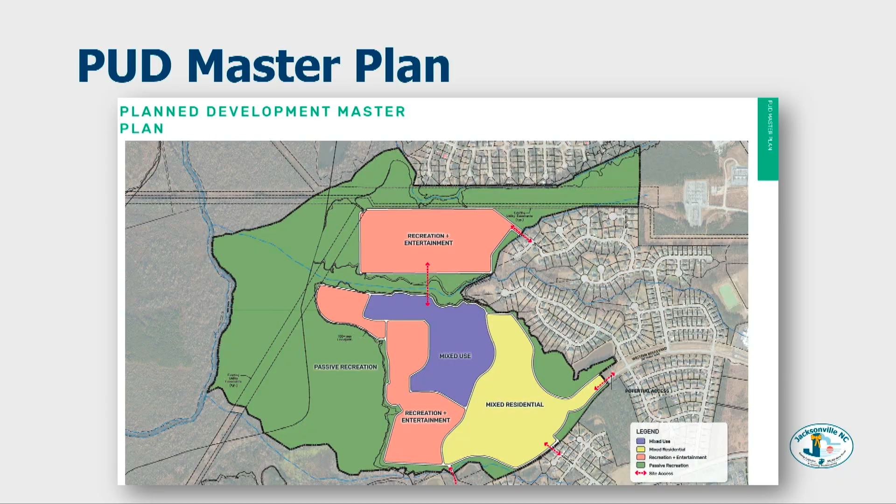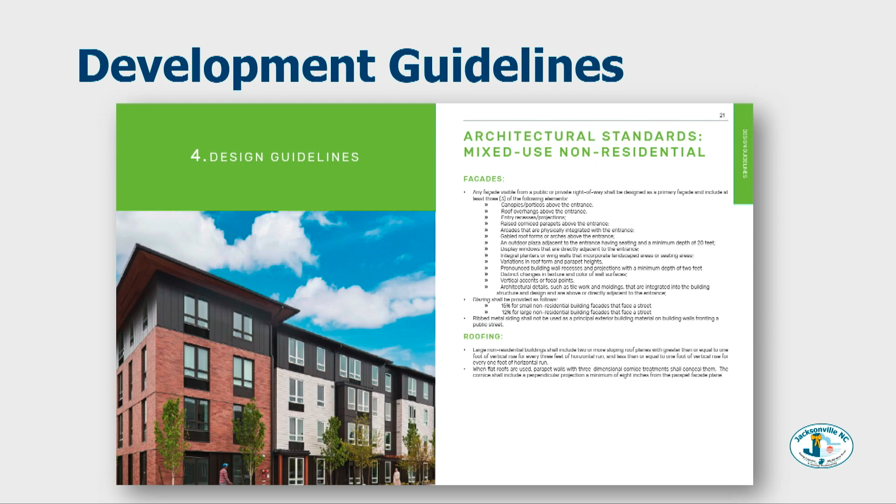The PUD is also going to include design guidelines. This is another way for us to make sure we're going to get the product we're looking for. You can see guidelines here for mixed use, non-residential, but it also has guidelines for residential and commercial and all the other different components we expect to be built out there.

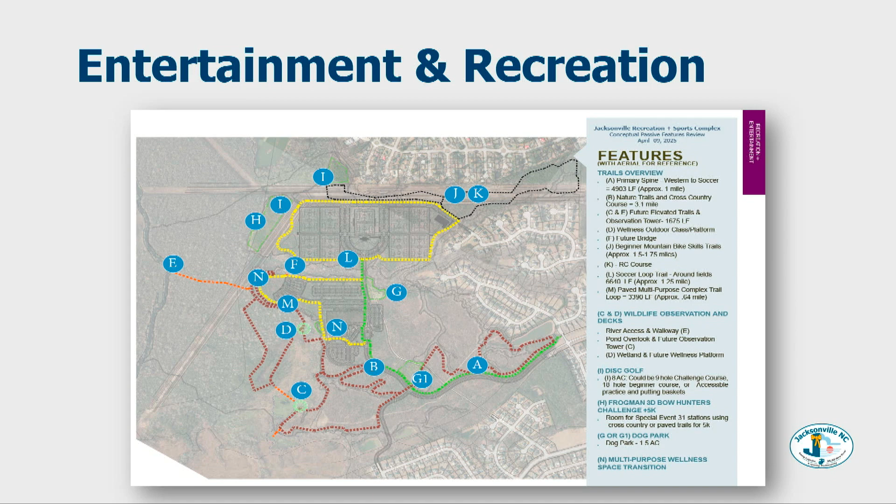Again, this is an excellent plan. It's something we want to carry forward with the planned unit development, but please know this plan has been very closely coordinated with the Parks and Recreation Master Plan that council adopted last year.

There's a dog park on there. Yeah, I'm seeing it. I have a lot of happy people—we get a lot of feedback about dog parks, so do we. And Michael pushed for a golf course, so you see a disc golf course because he didn't clarify what he wanted, and so that's on there. We've checked the box. He actually asked the county for a golf course, but they just told him no.

You see the uniqueness in that plan, trying to satisfy a lot of the needs we saw in the survey in one master development, which makes the PUD challenging but also very special for an end product. I hope by the time we get to the end you realize there are hundreds of hours of work by lots of people to make this the best possible product we can.

Transportation, last but not least, we're not going to get into the details here tonight. You'll hear more about it in the planned unit development hearing we'll have. But the good news is that it doesn't appear we're going to have to make any adjustments to the DOT infrastructure out at Gum Branch and Western.

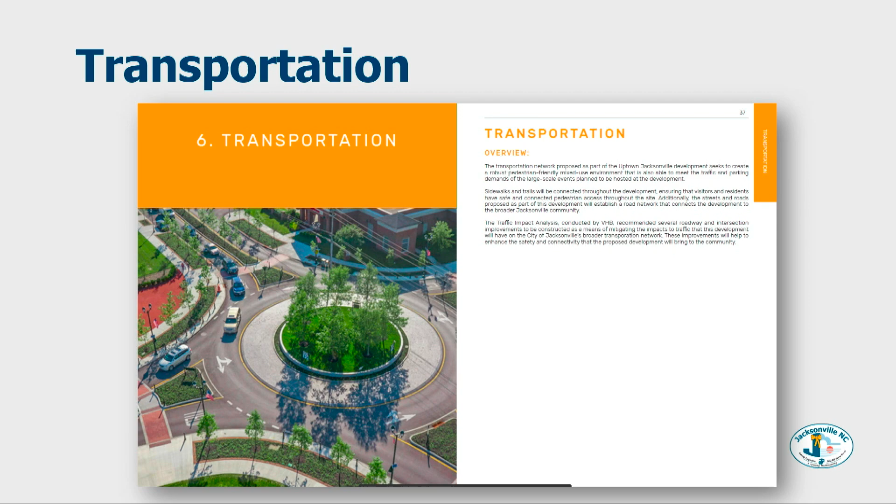As you recall, that roadway was just recently widened. And the widening out there came at a great time for us because we're going to be able to take advantage of it with this project, not having to make those improvements ourselves.

So it is moving forward. We are a little bit behind the curve on the timeline, mainly because we needed some survey data that we didn't have to get it started, but it's still well within the tolerances of the overall project.

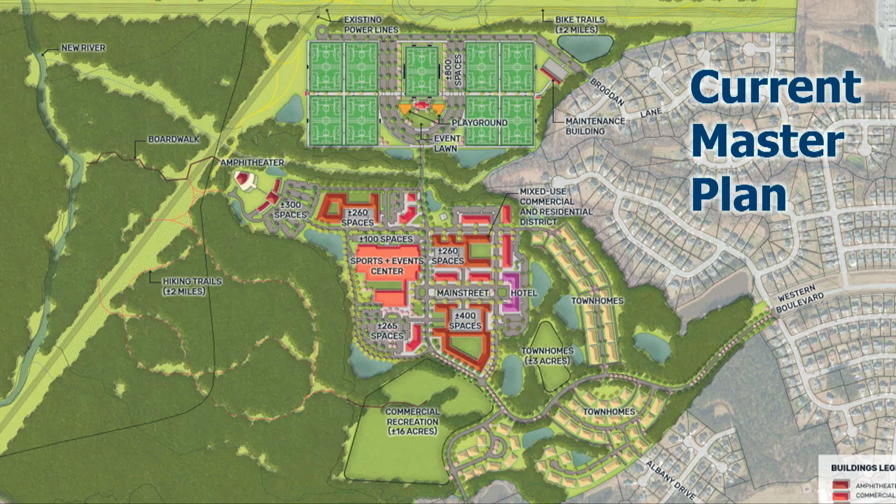So we showed this to you last time as well. This is the current master plan. It hasn't changed substantially. I'll show you a couple of areas where it's a little bit different in the future, but overall this still remains very valid.

And we're calibrating on the athletic fields. We have a consultant called Fit Fields, and that's all they do for a living, is design athletic fields. They're helping us make sure we get the maximum utility out of these, but also minimize our maintenance and resolve a lot of the operational concerns that come up when you have multiple different events going on at the same time in the same place.

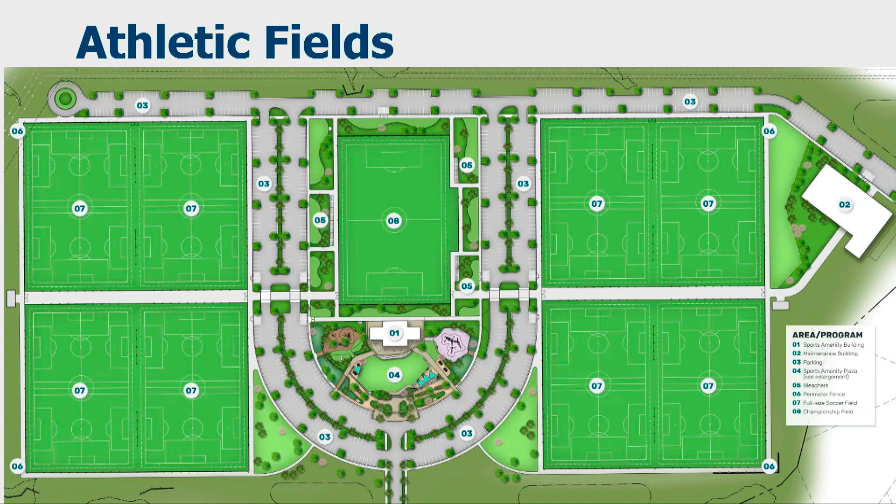So we'll price out turf too. We'll have several options for you to consider. There will be turf in that plan, because really that's the best way to make sure we're able to use it as much as possible. The grass is just unreliable, mainly because of weather. It's also difficult to maintain. So it's kind of a balancing act, cost versus.

Pay for it up front, then? Yeah, exactly. We'll have to figure all that out, but what we want to make sure is that we've got a sound concept here, and then we can help develop multiple pricing options and go from there. I can tell you turf fields are hotter too, the temperature around them is quite a bit warmer than around a grass field. You act like you have experience.

The other challenge with turf fields is that you have to treat stormwater. It's impervious. On a typical grass field, you don't have to treat the impervious surface. So these are all things that play out in not only the capital cost up front, but also the long-term maintenance.

We go with a mixture, part turf, part grass. And that's the beauty of these consultants. When Dave comes in and starts talking about managing these facilities, he says, in these other places where we have facilities, how do we maximize their utility? How do we get that space? A lot of the time we focused on the multi-use complex as being the indoor facility, but this right here, just seeing this picture tells you not only soccer and flag football and field hockey and lacrosse, but there's so much more activity that can happen here in this center that creates utility we just haven't seen before.

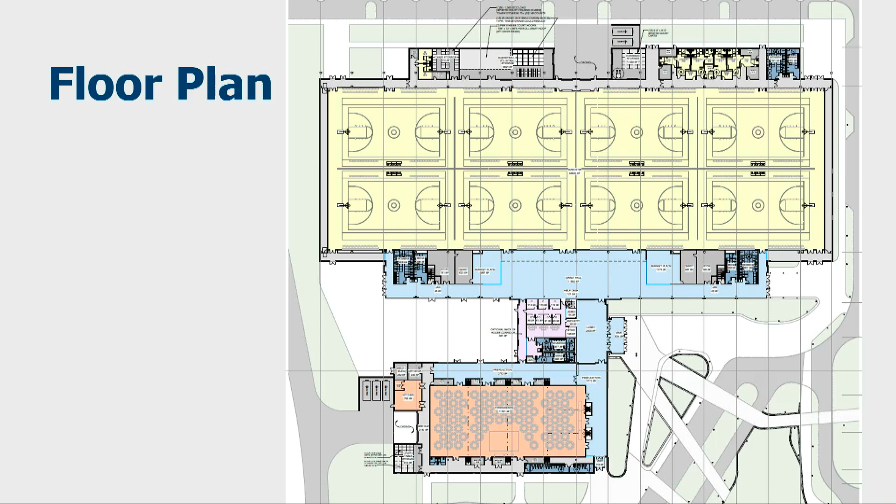So the northern side of the building is what I'll call the sports area - that's where the courts are, the large open space, all of that. Down here is where the conference area is. We have a courtyard in between the two that's going to be a controlled access area where patrons of the site will be able to go hang out or eat their lunch, dinner, whatever they're there for - an outdoor space in that controlled environment. And then we'll have a main entrance as well as the conference entrance.

Now, those aren't mutually exclusive. They'll be able to be used for both purposes, but we're just labeling them two different things to give you context there.

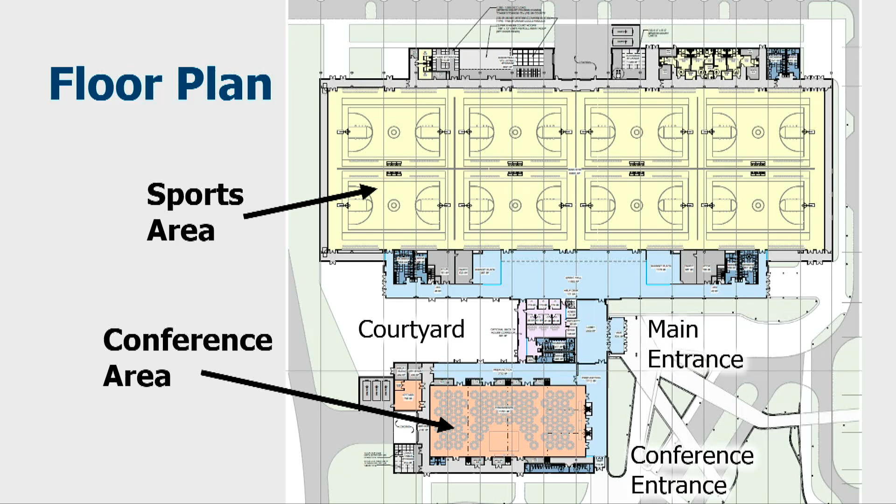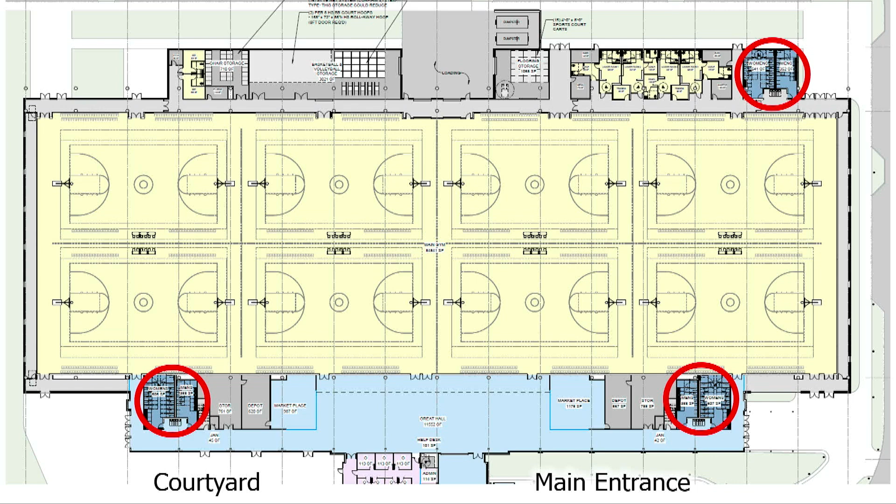So looking at the sports area, we heard loud and clear - I think Mr. Warden, you brought this up last time, and we also heard it from lots of others on the project team - restrooms are mission critical. So we went through and calibrated not only on the number of restrooms, but also on the location. We haven't expanded the footprint or square footage of the building, but what we have done is repurpose some of that space to include additional capacity for restrooms.

We also revised the loading dock area, so you can see that the loading dock is coming in from the side as opposed to the rear. That's feedback we've gotten from a whole variety of stakeholders on the project, and it just makes sense.

We also worked on the storage. Storage is a huge need for the facility, and what we've learned in a lot of the other facilities we've been to is that there's no such thing as too much storage, but there's only so much money in the budget to pay for it. So we want to right-size it. We spent a lot of time looking at what we're going to need to store, where, when, and how to get it out on the floor. So we've really honed in on what that plan is.

And last but not least, we've also been working on the locker rooms and the other rooms that support the athletic events. Dave from VenueWorks has really helped us figure out a lot of the details there. But again, this concept overall is the same - we've just really calibrated on some of the details.

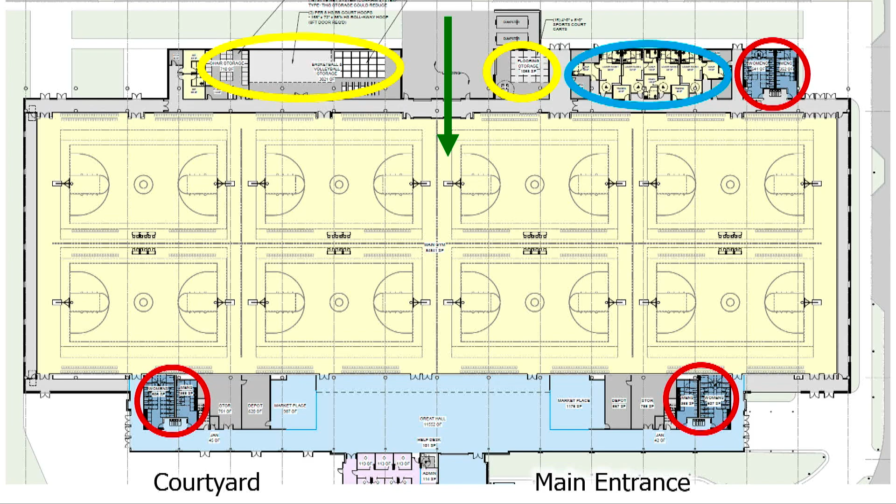So shifting to the south, you can see where the courtyard is there, the main entrance, and then the conference entrance. By and large, this remains the same. Again, we just worked on some of the details.

First being restrooms, having enough restrooms, putting them in the right places for not only the patrons of the facility, but also restrooms for the staff working on the back end of the operation. Again, we revised the loading location to make it more efficient and effective for supporting the building.

We've got common themes here. We looked at storage again on this side. In this case, we were actually able to shrink it a little bit, but that allowed us to increase the kitchen.

Initially, we were talking about just having a catering kitchen. The challenge is that, in working with Venue Works, food and beverage is the key area we're going to focus on for cost recovery. So we need to make sure we're adequately prepared to provide those services.

So those are the major changes to the inside of the building. It's going to be a full commercial kitchen, not a very large one though, 756 square feet. Venue Works gave us specifications of what they've used successfully in other places, and that's what we based it off of.

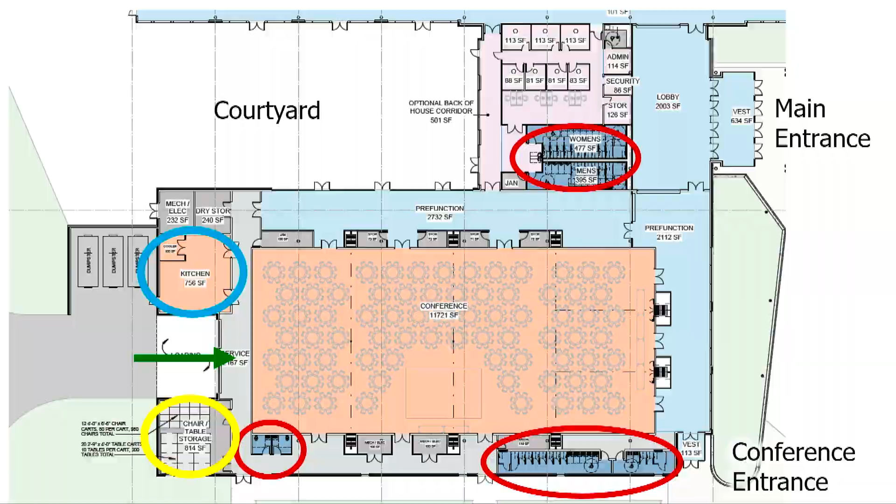So moving to the outside, again we have the same reference points: the courtyard, the main entrance, conference entrance. This shows you a little bit about the landscaping context outside of the building. Now, there are other areas we'll focus on at a later date, but these are the ones I believe are most functional for the facility itself.

You can see the courtyard there, top left. It has both hardscape and landscape, areas to sit and eat and just relax, or whatever you want to do in between events. We also plan to have some stormwater treatment facilities in there. These aren't wet ponds that are going to have mosquitoes and things involved with them. These are what we call dry basins that fill up with water. They give the area a little bit of topography, but then they drain down and dry out, and they're essentially just grassed. But it gives some interest to the area, if nothing else.

And then you move to the other side where the main entrance is. You can see we've got a nice tree line corridor there to kind of frame that main entrance and focus people on the front door. We also have a two-aisle circulation area for folks to be able to pick up and drop off their loved ones.

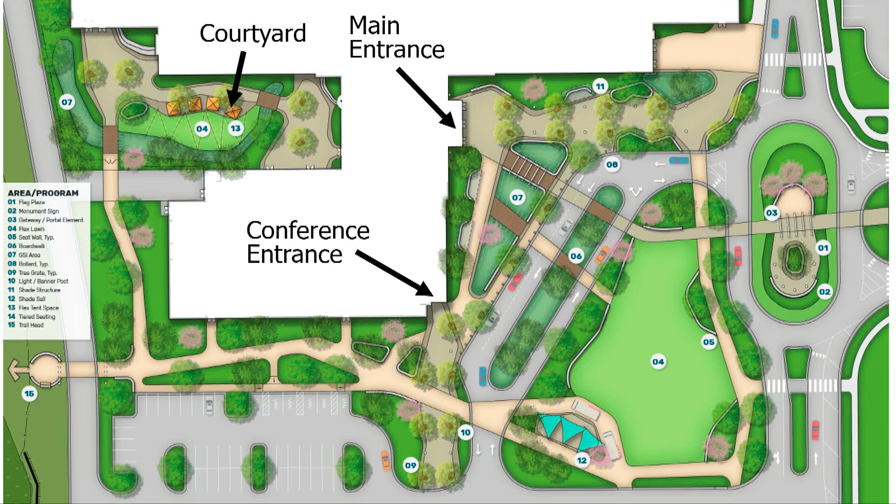So you put all of this together - what we've done to the site with the master plan, what we've done with the building, what we've done with the landscaping - and you end up with something that looks like this. I thought you were going to throw up a price tag there and kill the whole mood. We wouldn't do that - this is the thing, we're showing you the pretty pictures. One city center, how about that?

I like that. Now, will there be windows on the front? I can't tell on the right side, like where you'd look at the basketball courts - will there be windows or just a wall? There's windows in multiple locations on this front facility, so let's start left to right.

On the first floor there's lots of windows looking into the conference center. On what would be the second floor, it's not really a floor you occupy, but an open space that looks down into the conference area. You've got translucent panels - not clear, so to speak, but they allow light to go through. That's the southern-facing portion of the building, so you don't want that beating down summer sun coming into the building, but you do want that diffused light.

Then you move towards the center where the main entrance is - that's completely surrounded in glass. Not only does it allow light in, but it also reflects out in the evening, giving it more of a glowing feel. And then there's glass along the front on the right-hand side, that first story.

Second story is non-functional. Really, the only purpose of the second story is to get the sloped roof on it. That was a huge priority, to get the sloped roof for many reasons. But one of the side effects of that is that we have that kind of vertical height to be able to get the light in and use it.

So this is it from a perspective shot. Where's Lauradale at? It's way off in the distance on the right-hand side. You can't throw a stone and hit it from here, that's for sure. But it just gives you an idea of what the site might look like once it's all said and done.

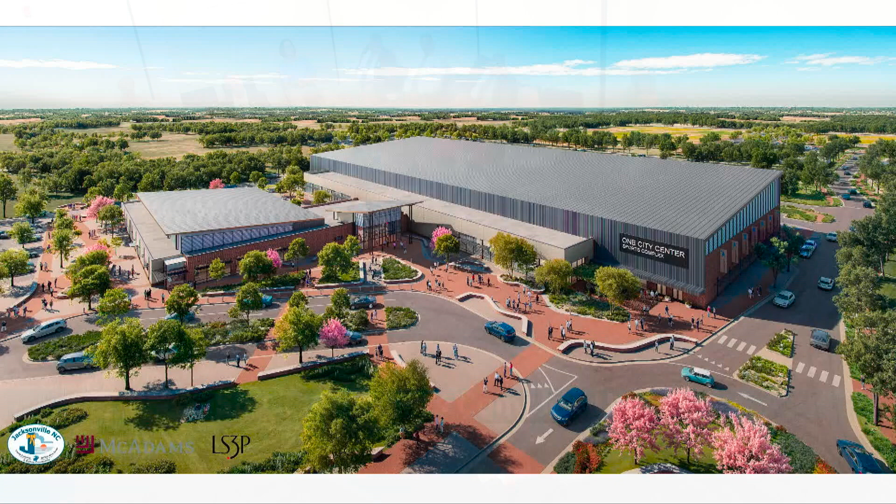Pretty. Very. Again, as I mentioned before, I think you can see the number of hours that have been put into this by a variety of different people. Many of the folks in the room here have participated. The consultant team that's helped us put the whole concept together, all the research that we did traveling around to see other facilities, it's really paying off.

So the next steps here, if we're okay with what we've seen, we're going to move forward to cost estimate and schematic design. The planned unit development is moving forward in July. The final design contract, as you recall, when we brought McAdams on board, we did so just for phase 1 of their contract. Now that we're through schematic design, we will have to look at phase 2 of their contract to get us to the finish line and ready to bid.

Once the planned unit development is done, we'll develop RFPs to get the private partners on board to help us with the residential and the multi-use development and all the other pieces. And then we'll also come back to talk about the management contract.

I failed to mention before that we do have Venue Works under contract for a very short term, 6 months right now. The reason is we need them to help support the design process. But the management contract is largely performance-based. That's one of the reasons that we liked it. They perform, they make more money, we have more events, and so forth. They do better when we do better. Absolutely, that's the way to look at it.